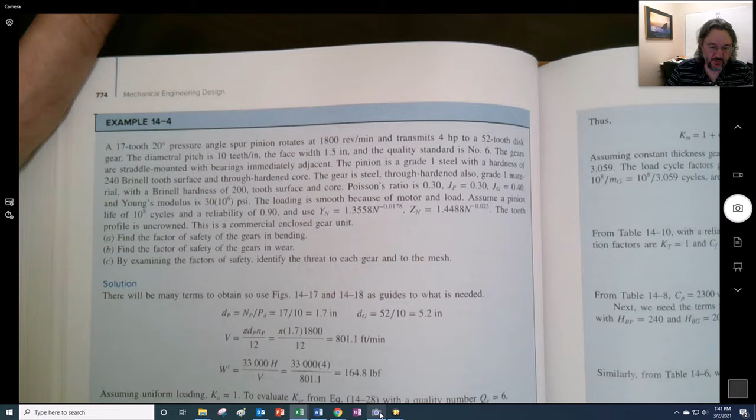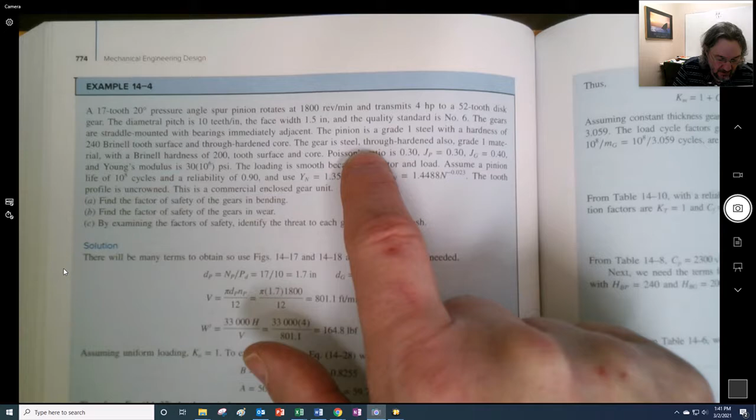Here's the example: we have 17 teeth, 20-degree pressure angle, a spur gear rotating at 1800 RPM transmitting 4 horsepower to a 52 tooth gear - so 17 going to 52. The pitch is 10, face width is 1.5, and the quality is number 6. The gears are straddle mounted with bearings immediately adjacent. The pinion is grade 1 steel with a hardness of 240 Brinell, tooth surface through-hardened. The gear is a different material, grade 1, with a hardness of 200, tooth surface and core.

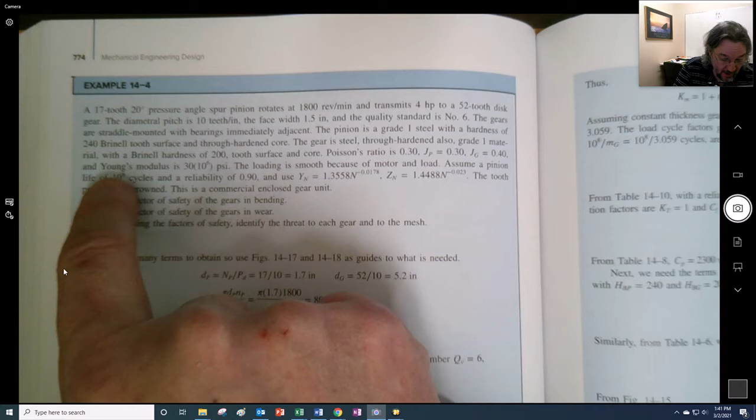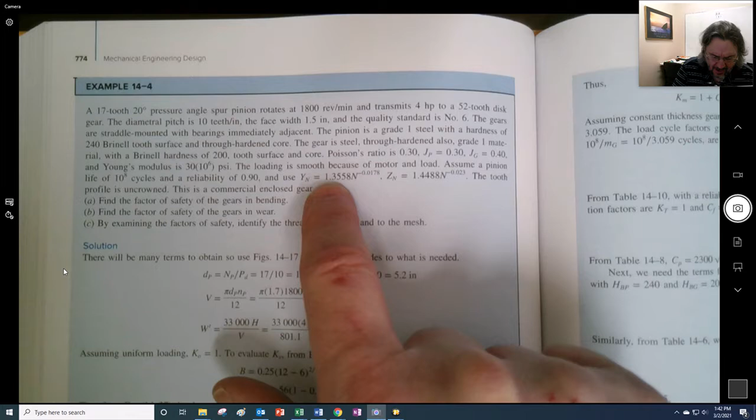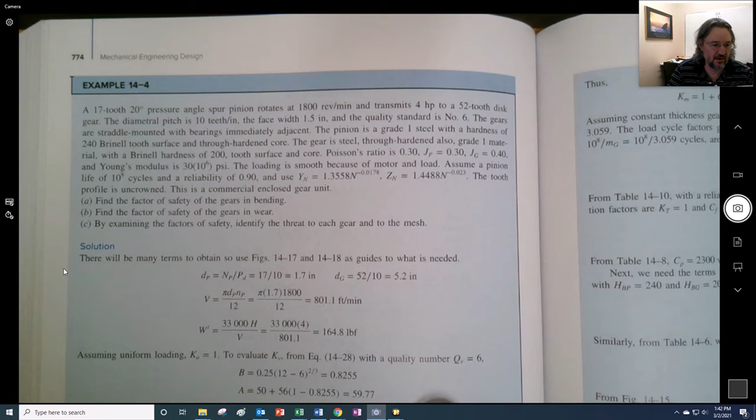Poisson's ratio is 0.3. They gave us JP and JG - normally we would look them up, I don't know why they did that for us, but we could have. It's got a modulus of 30 million PSI. The loading is smooth because of the motor and load, assume a pinion life of 100 million cycles and a reliability of 90. It tells us which equations to use off of that graph, so they figured some of that out for us. The tooth profile is uncrowned, and it's a commercial enclosed gear unit. We're going to find the factor of safety of the gear in bending and the factor of safety in wear, and by examining them, identify which failure mode governs. So we know our mission, let's go ahead and put this in the spreadsheet.

So it's 4 horsepower, 20-degree pressure angle. I should mention I use color coding: this color is given, this is calculated, this is something to look up, and this is something guessed. I say guessed because we're going to use the spreadsheet to estimate and go backwards using goal seek later on. The pitch is 10, face width is 1.5, the pinion has 17 teeth while the gear has 52 teeth. I don't need this line here, I just liked putting it in - I don't even know why it's still there, maybe we should remove it.

We said we had 1800 RPM right there, so you can see some of these things already worked out for you. Here's the diameter of the pinion and diameter of the gear, already worked out. I left it as through-hardened steel - this is really just a comment, but we have 240 Brinell hardness here, and 200 Brinell hardness here. I want E to the 8, so 1E8 right there. My size factor...

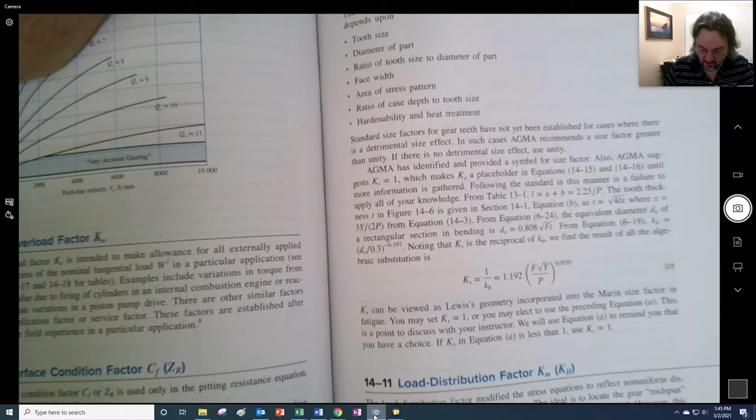For this one, I actually used a size factor, trying to keep with what they were using in the example. I would say normally just use 1, but if I want to keep with what's in the book, to get the same value as shown there, we'd use the equation that shows up as equation A in section 14.10. If we go to the size factor following that approach, we get 1.043 and 1.042 if we do these correctly. Coming back in here, that's this equation right here. You'll note what is y.

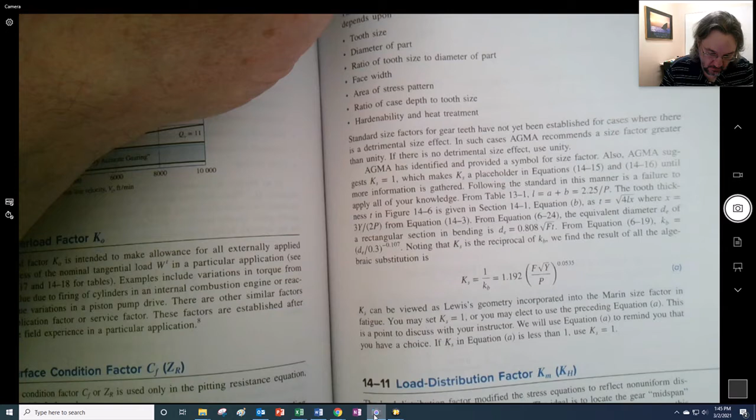Where did y come from? I think y is... yeah, do they use... yeah, I think they are.

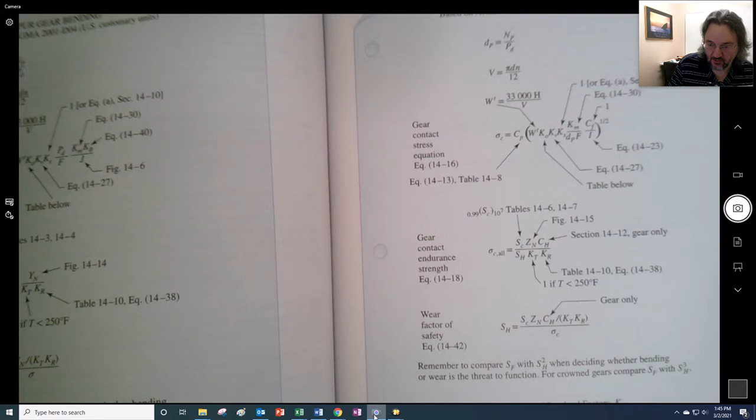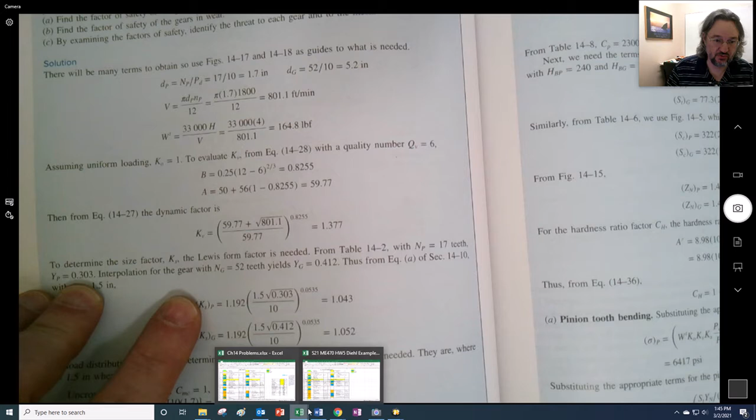Interesting, what do they say in the example? I need to hurry up and be more efficient here. But yeah, they looked up the Lewis form factor, right? So that's why I had the Lewis form factor in my original one, so I didn't need it back over here. If I look it up, I have a Lewis form factor of 0.303 for the pinion and 412 right there. So coming back into applying this, that's why I had it up here.

It wasn't needed though, and it's not going to be needed because we're going to use 1 for the thing, but we had 0.412 up into that gear.

So if I go to this equation right here, I say it equals 1.192 times this thing where I got that face width, right? Well actually it needs to be times a parentheses right there, and that's times the square root of this right here, square root of that divided by this again, and then close and raise to the...

0.0535. Okay, so this was not a necessary step for you, but if you want this to match up with the example so that you can set up your spreadsheet correctly, you would put that in there. And once again, that is the thing that we were trying to get.

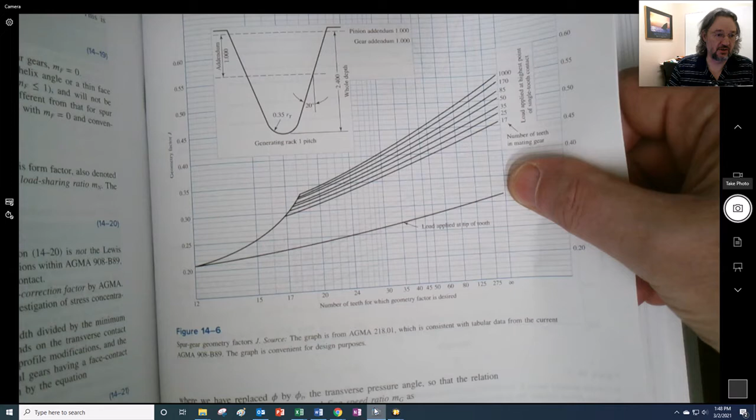The JP that was given to us, we could though also have looked it up inside this right here. So in this page right here is where we would have looked up that J for the pinion, but they gave it to us in the problem up above.

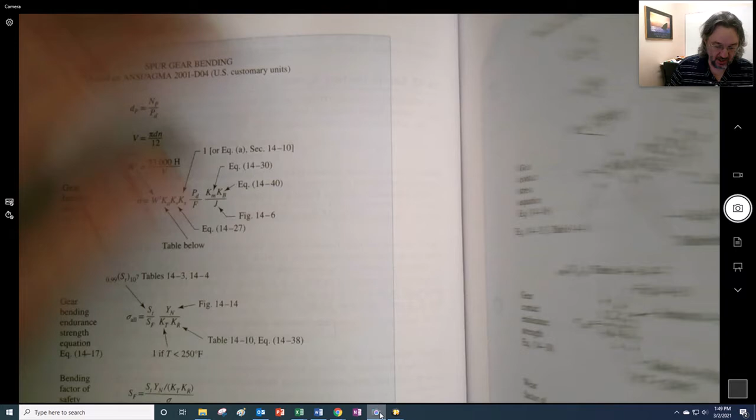So we'll type him in 0.3, and then right in here we'll have 0.4. I already have my equations placed in there for these standard ones here, but you'll see that they gave them right in here. But you want to make sure that you're using them correctly.

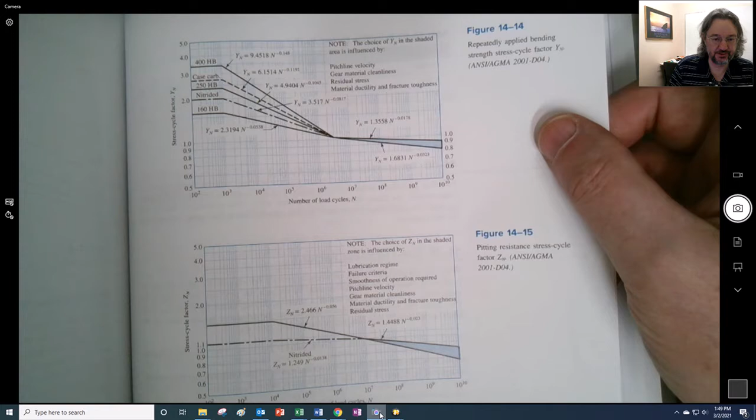So you want to double check that your situation is correct, and that's really for some where you have more cycles than 10 million, so anything greater than 10 to the 7.

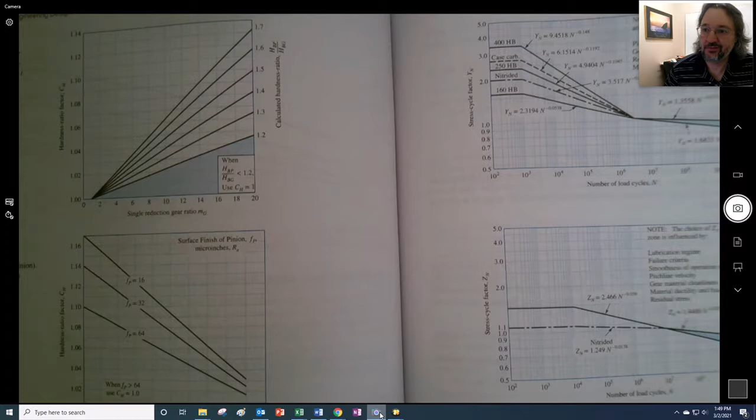So I have some kind of phone call coming in from Canaan, Connecticut. I don't know, they're going to ask me about my car insurance warranty or whatever the hell it is.

So let's see, coming back here. Okay, so we go to KO, and according to the problem, they make a decision that they're going to assume it's uniform loading. So KO is equal to 1. If it wasn't uniform, we would be using this table down here for that KO. But we'll set it equal to 1 because they told us so.

The quality, they told us it was 6. Right, so I've already set up this A and this B for you. We want to go to the KV, so that is an equation you have to enter in for the dynamic factor. And that equation is right here.

So we're going to use, we have our V already calculated at the top. We're going to take that A right there and place it in. Let's see, I'll place that right in here. We're going to say equals parentheses A plus square root of V, which is right up here. Close that for the parentheses, close this for the other parentheses, divide it by A.

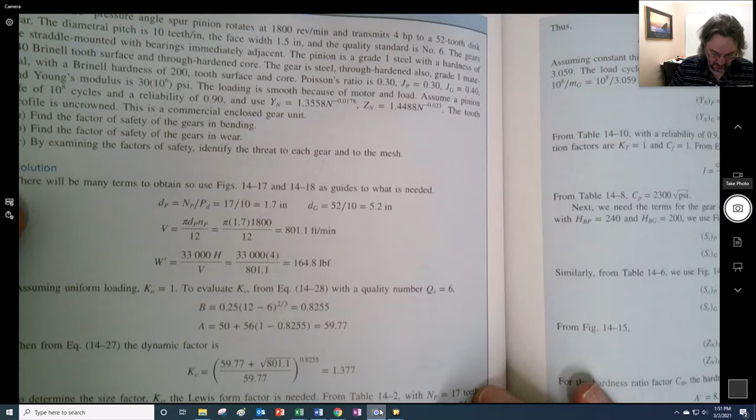And then close, okay, and then raise to the B. Kaboom, 1.377, and that agrees with the dynamic factor that we will get out of the book somewhere right there. Boom, 1.377.

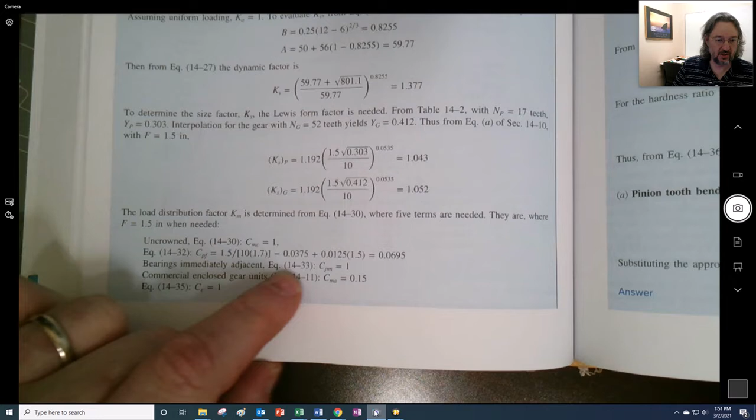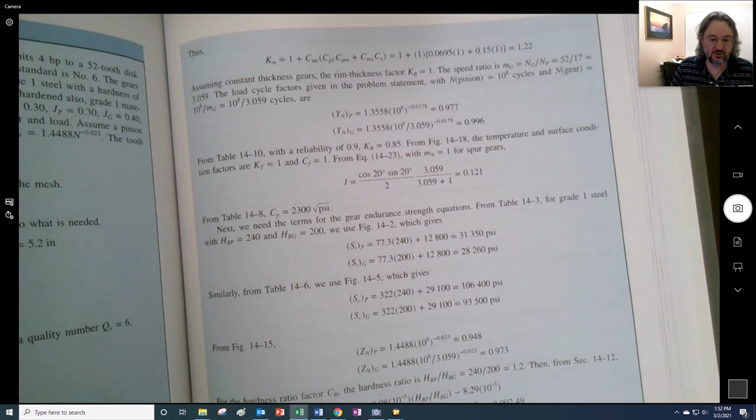Okay, so all of this mess I've decided to bypass. I'm just going to write in, if I'm given, this KM. In the book, it is discussed right here, where we go through the thought process for all of these, and then we bring them all down, and we get 1.22. If you do them correctly, you'd get 1.220, so it's fine.

1.22 is fine, I'll put that right here. The rim we're going to say is 1 because there's no rim. For the temperature, we're going to accept that as 1 because it's all right. We had a reliability of 0.9, so we need to look that up in a table, and that table is table 14-10. So we have 0.85 right here.

Now here's the longest one that you're going to have to calculate for. This is going to be the allowable strength that you're going to find for the thing. Oh, maybe it's not the longest one. Let me take that back.

So we're going to calculate that for an equation that shows up in the book right here. So when we get to the strength right here, we look up from table 14.3 for grade 1 steel, and they tell us to use figure 14.2. This is the process that you should be going through for the homework.

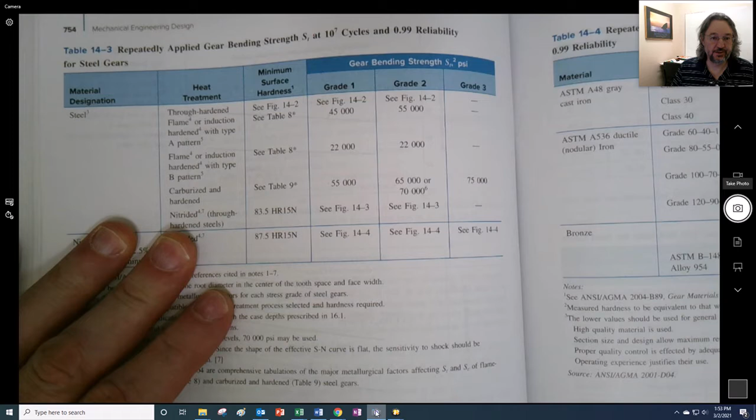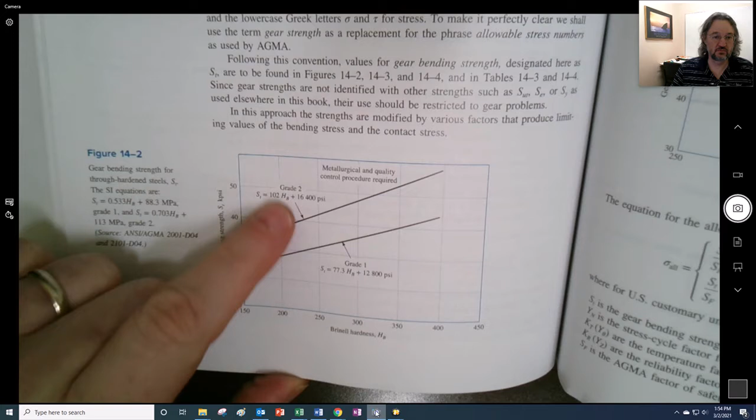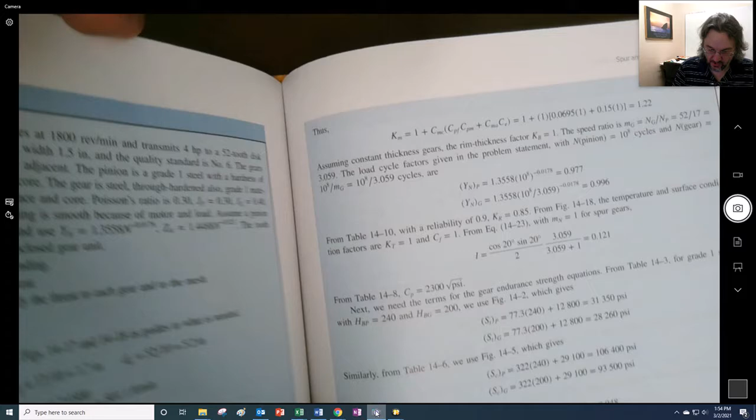So if we go to 14.3, what we end up saying is we need to use figure 14.2, and I think for this one we're using 14.2. We're going to use one of these two equations. Which one did we decide we use? We decided that it was grade 1 steel. So yes, we are using this equation right here with the 77.3.

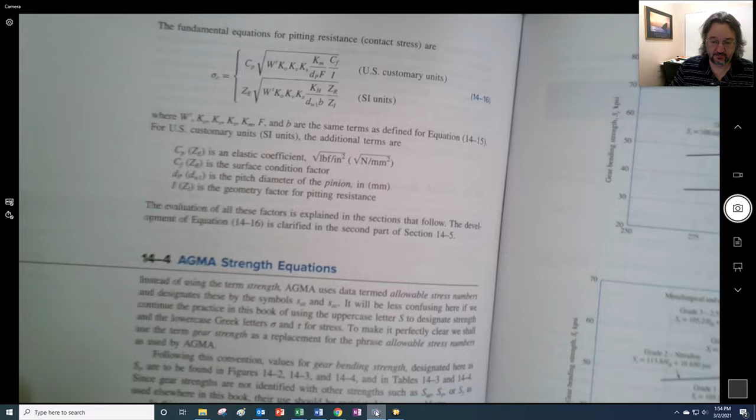77.3 times the thing. So let's put it into place here, and it equals 77.3 times, and this is the hardness, which I think was written up higher, right there, plus our 12,800, I believe. And yes, you should be getting 31,350. I think they rounded off in the book.

I think we do the same thing, I'm going to copy it from there, put it into here, but now we're going to move the hardness over to there. And yes, we get 28,260, which should match the book. We could be hopeful about matching the book. Yeah, no, we get the same thing.

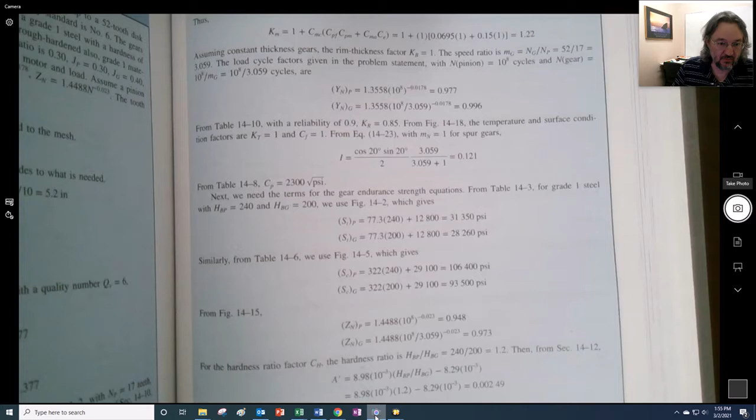Okay, so where else are we? Where are we at right now? We want to close this problem down. So far, we could actually see that we have this whole thing set up. I've actually done the stress calculation for you right in there. I really shouldn't do this stress calculation for you. You should do it.

So maybe I should leave that out. I think I meant to leave it out. I guess I'll leave it in, I don't know. But it all goes back to this formula right here. I think by leaving it in there, I'm giving you too much, but I want you just to walk through that. That right there is this equation right in here.

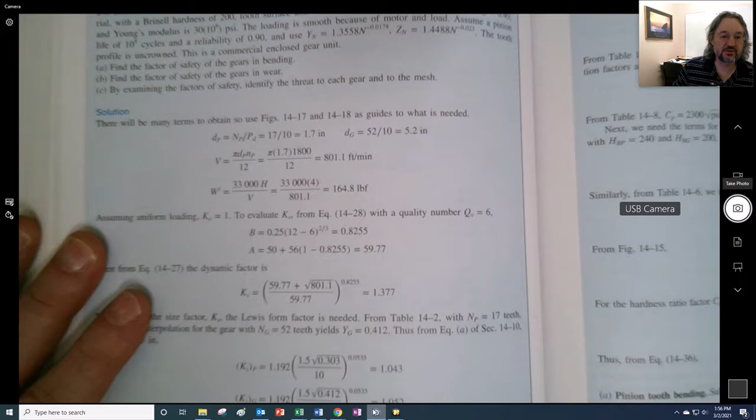But if you work through the examples right in here, if you work through this right here, you should get that 6,417 right here. That's our goal, to make sure that we have everything set up the right way.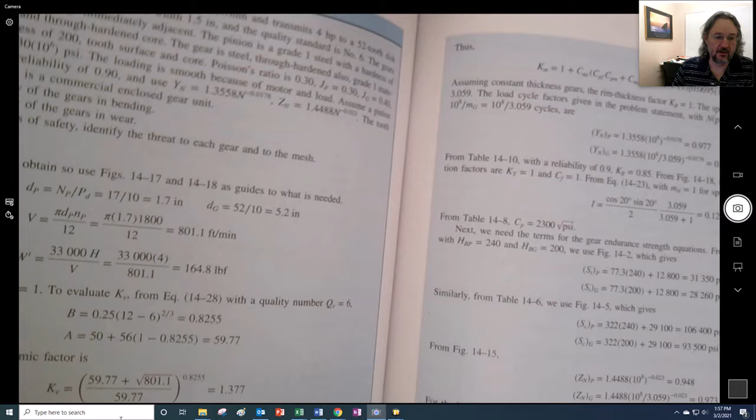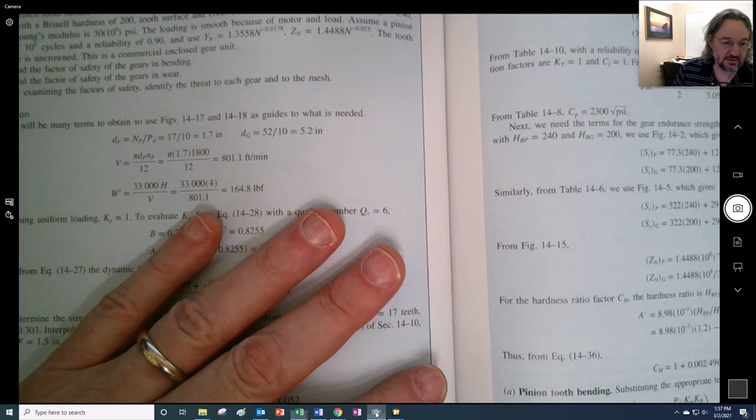So I really should be getting rid of that. I really feel that that's like doing too much for you, right? So let me get rid of that, and get rid of these. I only have a couple of minutes left until class, but we will work through this equation right here, so that we can at least have the experience of thinking our way through the thing.

So we say equal to, and I almost want to write that equation somewhere right here. So let me pause. Here's the equation right there. Blow it up so we can look at it as we're writing this thing out.

So we say the stress is equal to WT, times my KO, times my KV, which is right there, times my KS. Where'd you go, KS? Oh, you're right up here. Size factor, times my pitch, divided by my face, force, multiplied by my KM, multiplied by my KB, and then divided by my J.

And I get the 6,417. If I'm a little bit lazy, I copy that all over. And the only things that change, everything is the same, this factor, that JP comes to the JG, and I don't think anything else changes. So did we get the 4,813? Let me double check right in here. I'm going to see my other side over here. No, I made something different. What did I do differently?

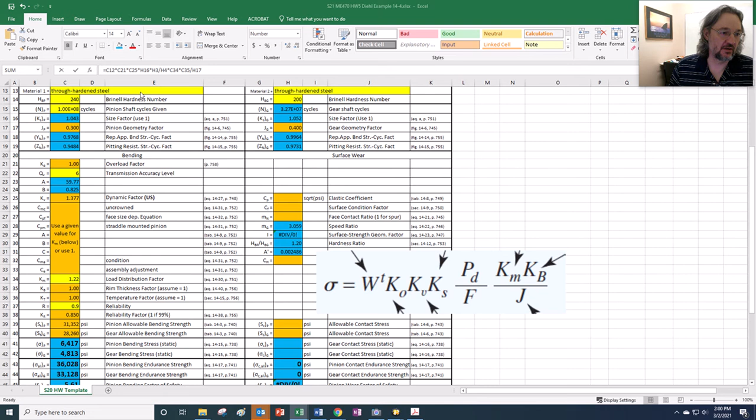So where are we going on here? We want to change this. I see it's trying to do that. Okay, change this right here, change the size factor over. Boom.

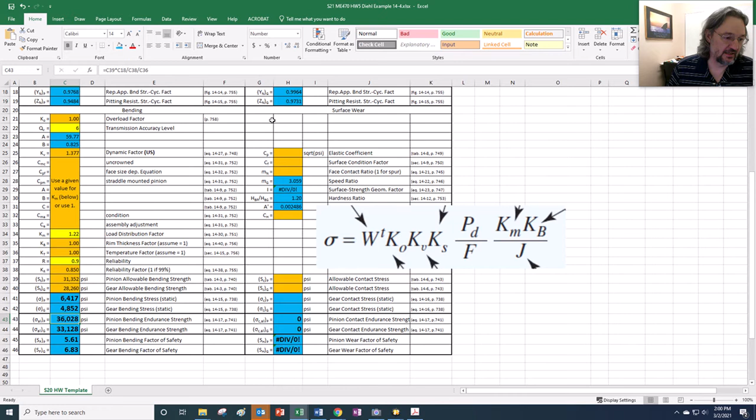Now we should be getting the exact same thing as the book right in here. So we're going to start class in about 9 minutes, we have to get in here.

So there's actually, where did I cut? No, I see, I'm calculating on the spot. There you go, 4854, okay.

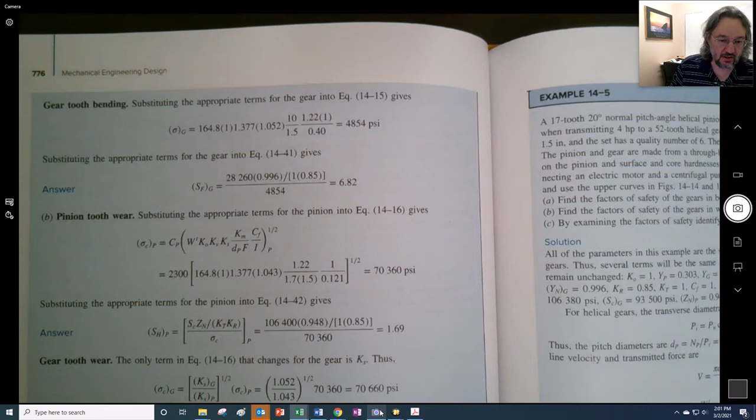Let's see, we're going to continue on. So we got the same thing there, and we can see that we got the same, I'll leave this in the same, this is the allowable right there from those equations, and then we're going to get the same factor of safety. So for the gear, right here is a factor of safety, little difference, 6.82.

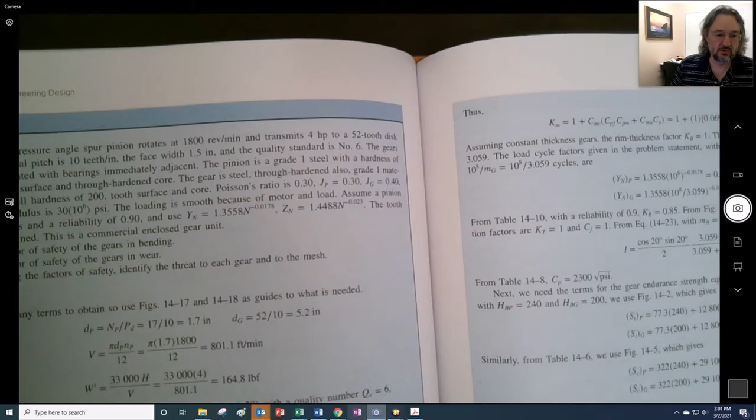I get 6.83, I think. And then we also have the 5.62. So those are slightly different, but no big deal.

Now we want to do the same thing for over here, the elastic coefficient. All right, so that's going to be 2300, we look that up. Surface condition factor, 1. The face ratio, that's 1 as well.

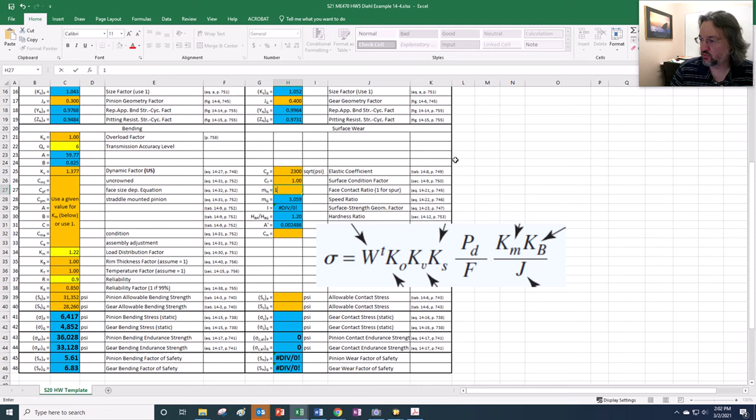Let me get rid of this equation, doesn't need it anymore. I worked all these things out for you. The hardness ratio, you know what, I left this as 1 for mine.

What they did is they went through a process right here for the hardness ratio where they get this, and then they put it back in and they get 1.005.

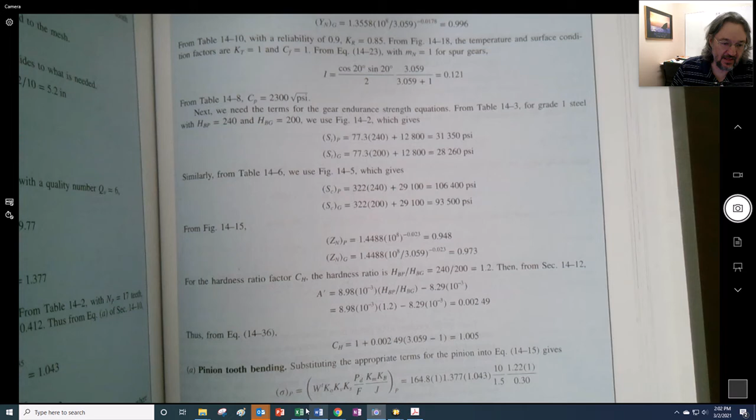I don't know, I kind of just want to put 1 in there for right now, but I think you can calculate the thing out with that equation.

Like I said, I'm running out of time, but I also don't want to just skip over this right here. Okay, so here is where that shows up.

So if you wanted to get it to be identical right in here, and of course we said that they're the same in here, you say that it's going to be equal to 1 plus this A prime times the gear ratio, which is right there, minus 1, right? And so if we did it right there, you get our factor right in there.

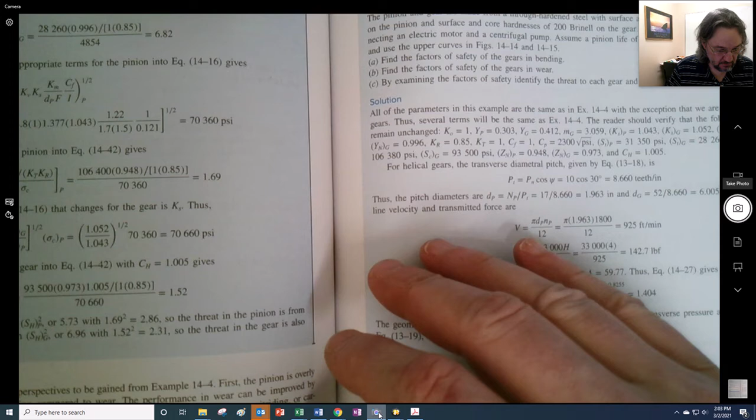So the allowable stress, contact stress, that for them comes from right here from figure 14.5, and we've used this 322.

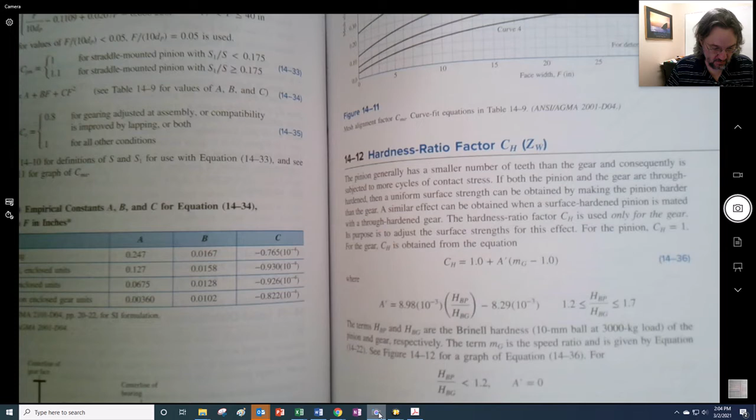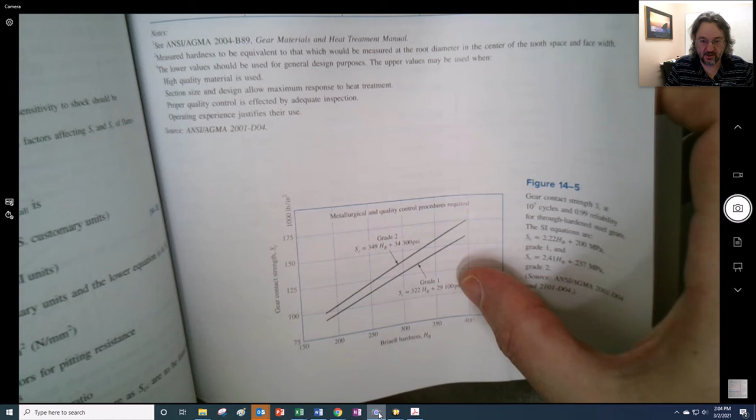Let's double check where they got that from. That comes from this right here. So they use the table, they carefully think it through, and with the information given they decided that was the correct equation to use back in there.

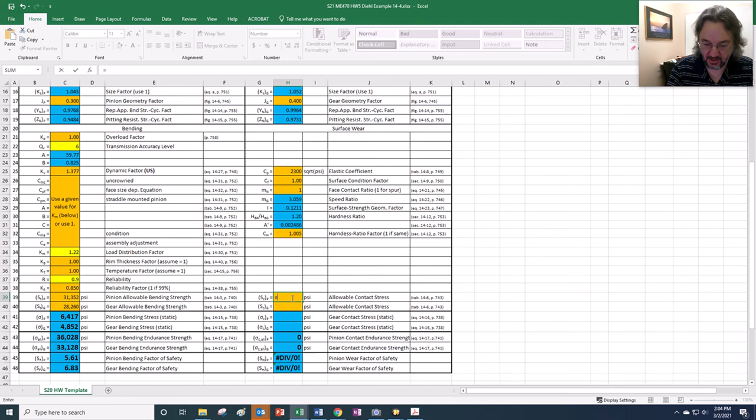So we go ahead and do the same thing here, and we say that it's going to be equal to, let me take a peek at this. What? Oh no, I want to say it's equal to, what's going on over here? I don't know what this guy is doing to me. Okay, this is what that guy's doing to me.

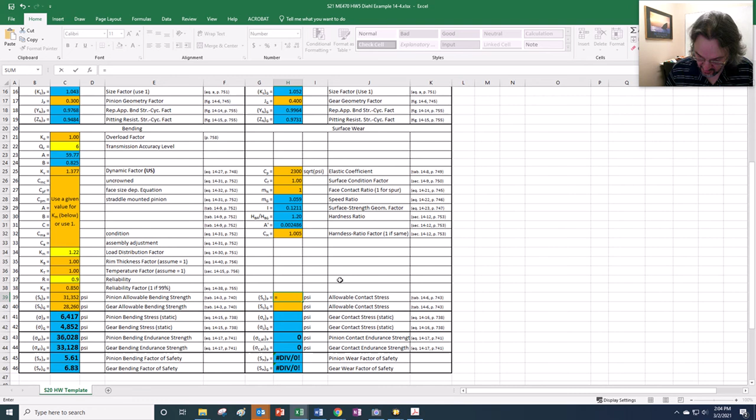Wow, all right, so what happens when you panic? You don't panic, that's what the Hitchhiker's Guide to the Galaxy tells you to do.

So that's going to be that times that plus 29,100 right here, boom. And I'll reuse this, but the hardness changes over here, so you can see what the effect of the hardness is going to be.

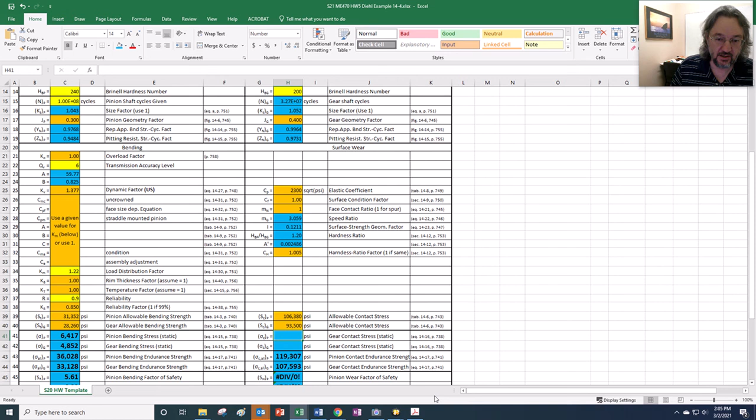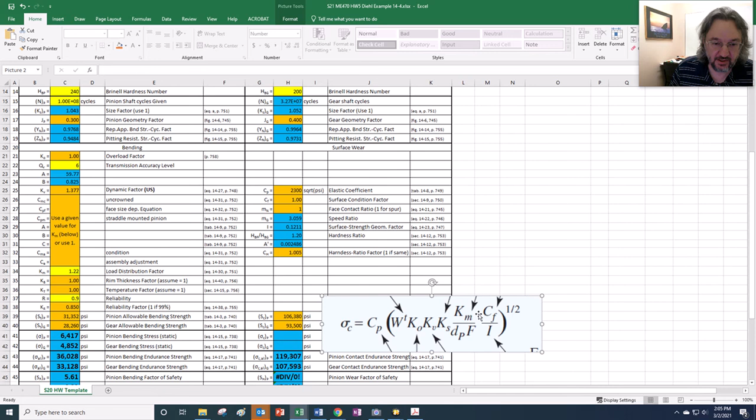And then lastly, we take this equation right here, plug it in, and start populating this thing with what we know. We're going to say equals CP times the square root of WT times KO times KV.

Times KS. Remember, the size factor is going to make something different for this, but most of the time it's not going to change for us. KM, which we don't use much. Diameter of the pinion, and this is always the diameter of the pinion, divided by the face width, right there, multiplied by CF, and then divided by I.

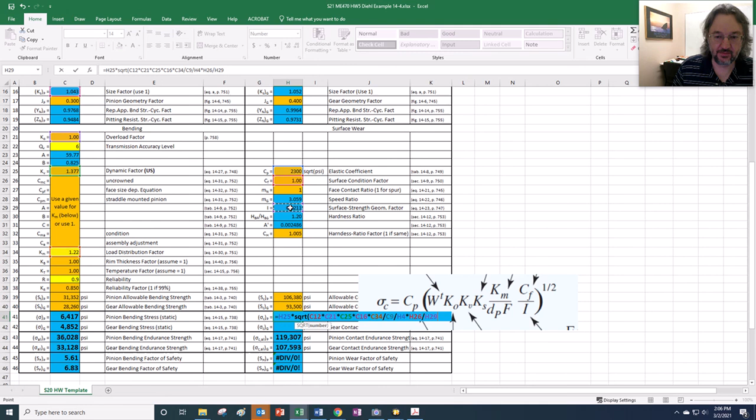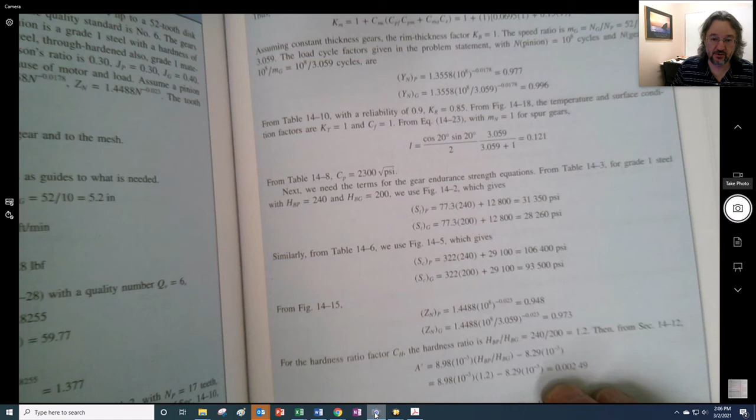And we're going to close that. Let's see if we got the right one. Let me compare it to my previous work, 70,331. Sure enough, it also should compare with what's in the book right here for stress.

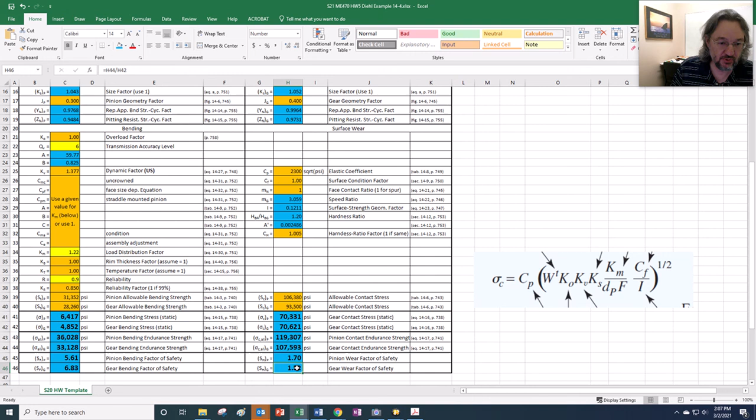7360, it's pretty close. And now if we just copy this whole thing over and modify, I think only the size factor will change. Let me see if I got it right. Yeah, pretty close. And then now you can see we got pretty darn close to all the other numbers that are in here. We get 1.69 and 1.52.